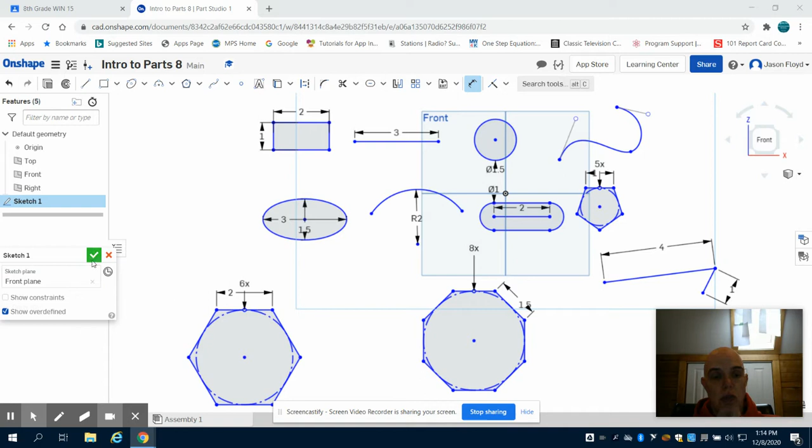Where we last left off, we created our two-dimensional drawings, practicing our drawing tools. Now we're going to close out our first sketch by hitting this green check mark. You can see that we have sketch 1 identified on this side. But what we're going to do is hide this sketch. By clicking on this eye, it allows us to still have it there, but hidden.

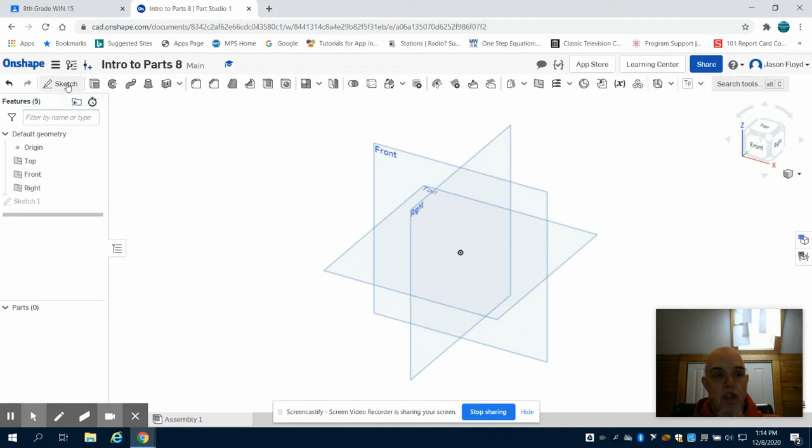I'm going to use my orientation cube to clearly see my three planes. This time I'm going to create a sketch and place it on my top plane. You can see that top plane is highlighted, and my piece of sketch paper is laid down. I'm going to go to my orientation cube and click on the top.

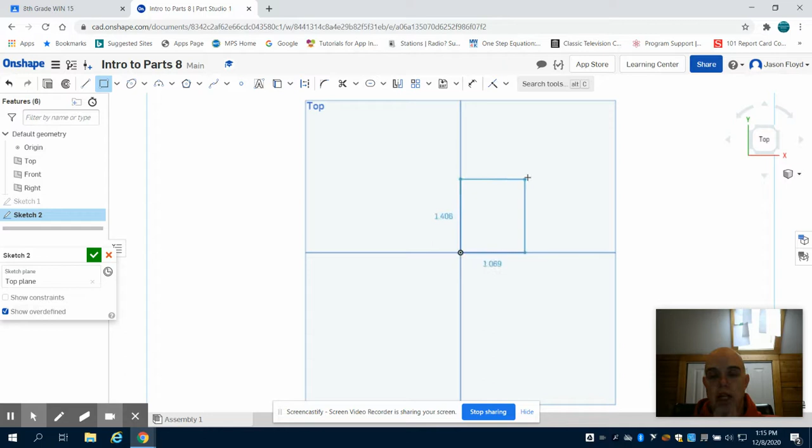I'm now going to create a 2x2x2 cube. I'm going to click on my rectangle tool, click on my center point of my axis, the 0,0 point, and drag up and to the right. Again, I want a 2-inch square, so I'm going to get approximate. I'm going to click down again to lay it down, and type 2, enter, 2, enter.

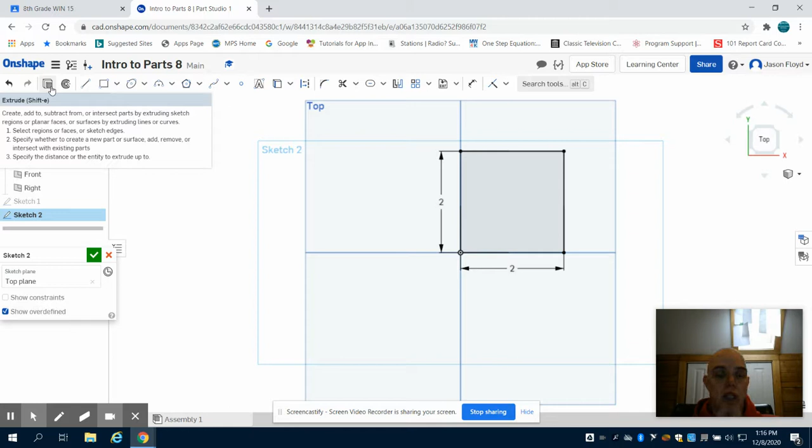You'll notice that plus sign shows that this tool is still activated, so I'm going to hit the escape button to have my pointer tool, which is new up here. We can see our extrude button. What an extrusion does is allow you to expand on a closed drawing, meaning all the points of the drawing either do not overlap and are closed.

So I'm going to click on an extrusion, and it highlights that face of the sketch I just drew. I get a menu here. Because I want it 2x2, I'm going to put 2 inches. That makes my extrusion 2 inches, and I can click on my green check mark.

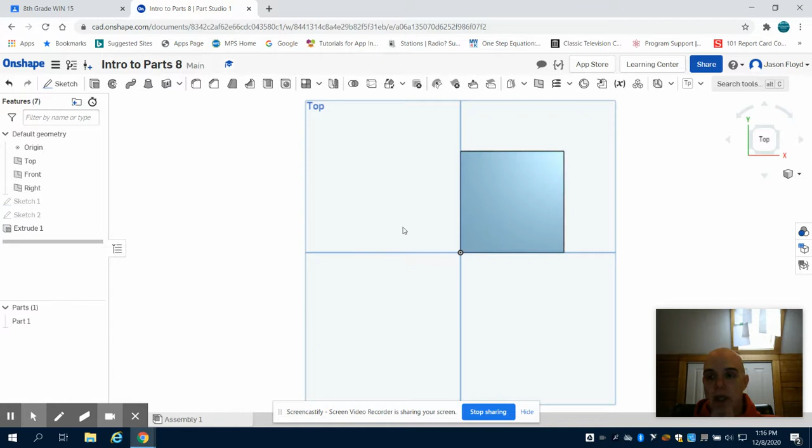Now it doesn't appear to have done much, but if I grab my navigation cube, I can see, gaining perspective, that I've created a 2x2 cube. So I'm going to come back over here, and I can see this is now called Part 1 because it has an extrusion on it. It is now identified as a part by the program.

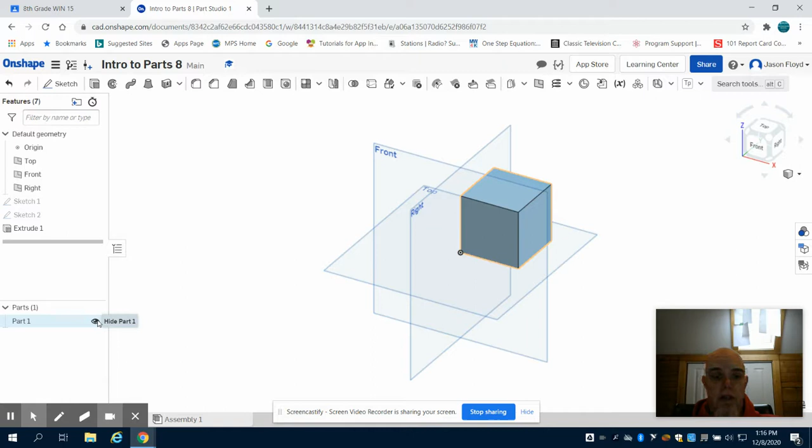I'm going to click on my little eye icon to hide that, because I'd like to create another part here. So I'm going to come back to my sketch and lay another sketch down on that top plane. I'm going to grab my orientation cube to view the top.

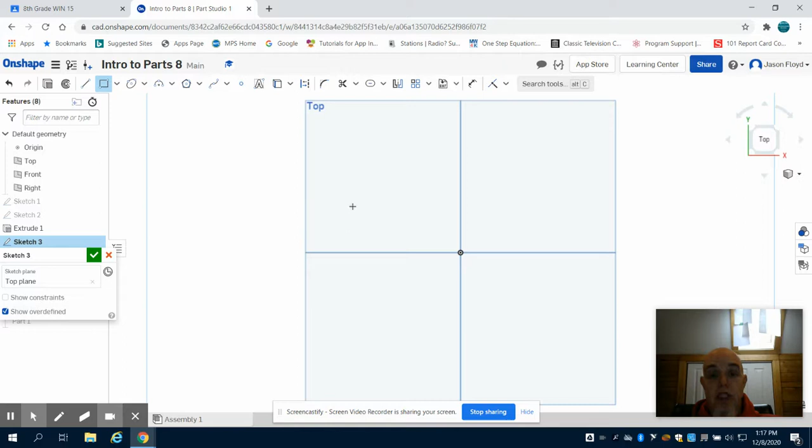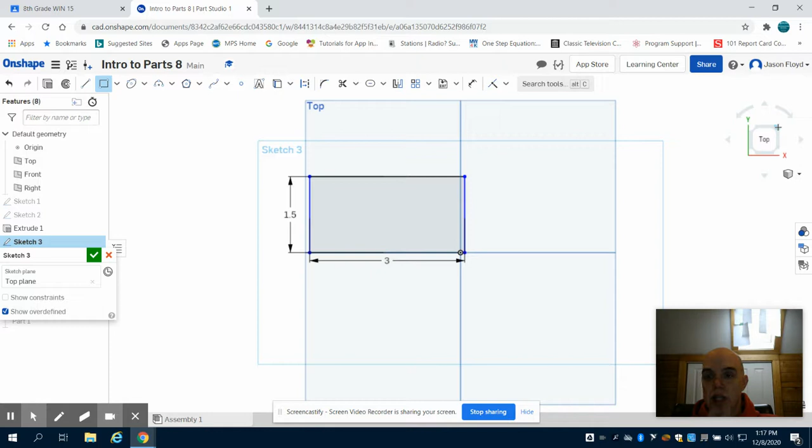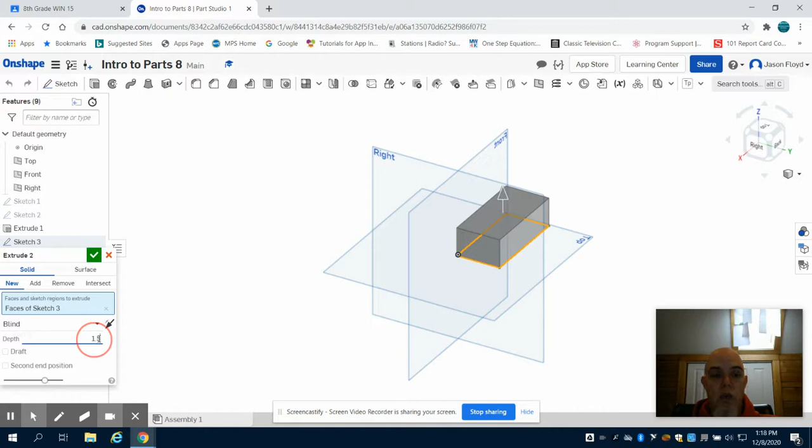Now I'm going to do something different on this one just to show you how the extrusion works. I'm going to change my perspective, and I can see that drawing on the graph paper now. I'm going to click my extrude button. That face that I drew, that closed drawing, is now highlighted, and we can see that extrusion happening in real time. Because I want my rectangle to be 1.5 by 1.5, I'm going to type 1.5 in my extrusion, click my green check mark, and I now can see that.

So if I highlight Part 1, I can see Part 1 is there, Part 2 is there. If I click that eye again, I can hide Part 2, and I can have that blank drawing space again.